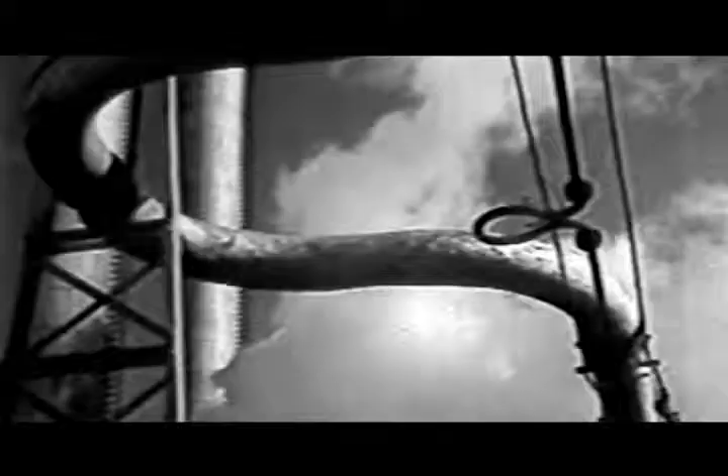The consumption of gasoline in 2005 reached the amount of 67 million liters per day, and Iran was still struggling to achieve the balance between gasoline consumption and production.

Accordingly, the planning department of Iranian National Oil Refining and Distribution Company recognized as mandatory the execution of 10 projects, expansion and upgrading operation in 7 refineries, by reviewing and comparing the investment plans of Middle East countries in the coming 5 years. The decision was approved anticipating a 4 million liter increase in gasoline production per day in Iran.

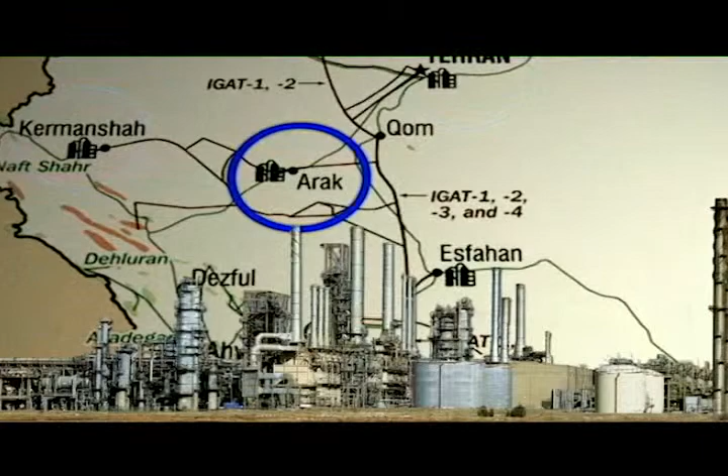The first and most important refinery determined for executing the expansion project was Imam Khomeini Refinery near Shazand, a town near Arak.

The NIORDC company delegated the expansion project of this refinery to National Iranian Oil Engineering and Construction Company, its project executive wing, and as a matter of fact it was their first crucial refinery project after 15 years. Its feasibility study and policy review were accomplished with high sensitivity considering the political and economic conditions of those years.

The feasibility study of the project took place in the planning department of NIORDC with the cooperation of NIOC company in 2002.

Selecting the RHU plus RFCC model as the appropriate model, this project with a 45-month schedule was approved in the Supreme Economic Council and Council of Ministers in 2003.

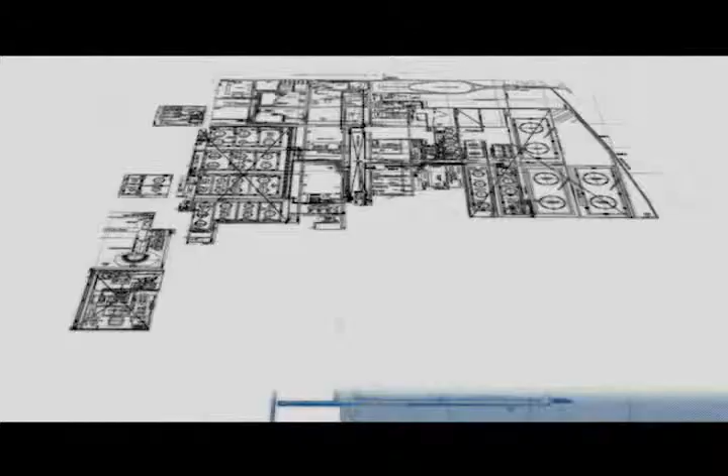The contract with JGC company was for 11 months, which we could terminate on time fortunately, with the efforts of all practitioners such as contractors, the employer team, and the companies that had the technology. In July 2005, JGC submitted all design documents to the employer completely.

At the initial time, when the basic design was in process, different supervisors from corporate planning management, NIOC company, and even our colleagues from Shazand Refinery were present in Japan. This means this stage was accomplished with full study and dominance.

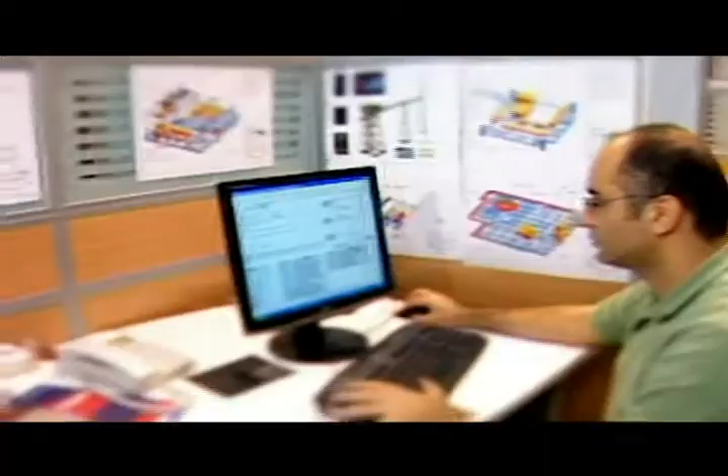At the beginning, there were 4 targets specified to be considered by JGC company in the basic design. First, to increase the producing capacity from 170,000 barrels per day to 250,000 barrels.

Second, to increase the capacity of gasoline production from 4.7 million liters per day to 15.9 million liters. Third, to improve the quality of current and future products to Euro 4 and 5 standards.

Fourth, to reduce environmental pollution by changing the feeding type from 100% Ahvaz light crude oil to 55% Ahvaz oil and 45% heavy crude oil from other fields.

Until then, we supplied 100% of our feed from Ahvaz Asmari, but in the detailed engineering it was designed to use 45% from the heavy crude oil of the northern Dezful field, 10% from a mixture of 10 different fields, and the rest from Ahvaz Asmari.

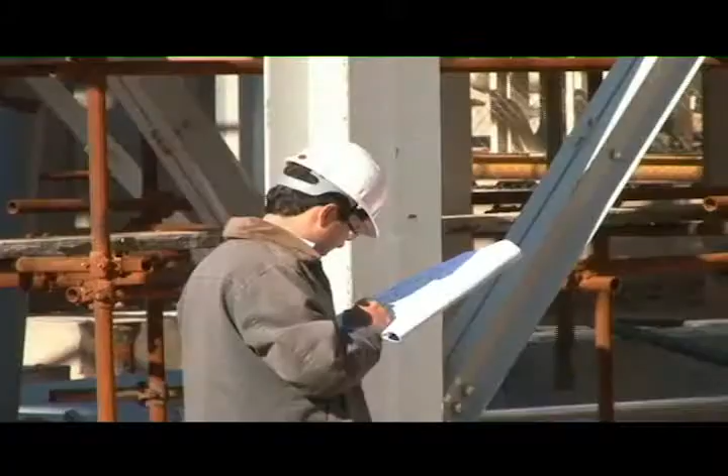The project started in three parallel scopes: planning and engineering, procurement, and construction. The detailed engineering of the different units broke down quite distinctively between the members of the consortium, and construction of each unit started under the supervision of the project management.

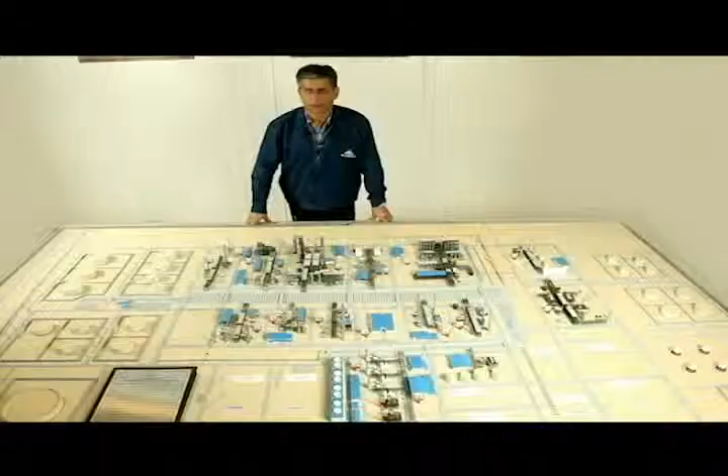At the beginning, when the vision plan was taking place, it was necessary to specify the scope of works of each consortium member. That was accomplished by cooperation and coordination and holding regular meetings, and the scope of work of each member was specified in this way.

Shazand Consultant Company took responsibility for the main distillation unit of the project, hydrogen unit, gas oil treatment unit, kerosene treatment, isomerization, the final distillation of gasoline, and also some parts of the reservoir tanks. The utility unit, including electricity power, water and steam unit, was divided between SEI and Shazand, though at the end Shazand did the major activities there.

Design, construction and installations in optimizer, RFCC and RCD units were carried out by SEI, and ODCC executed the LPG and propylene, amine and sulfur units and the rest of the tanks.

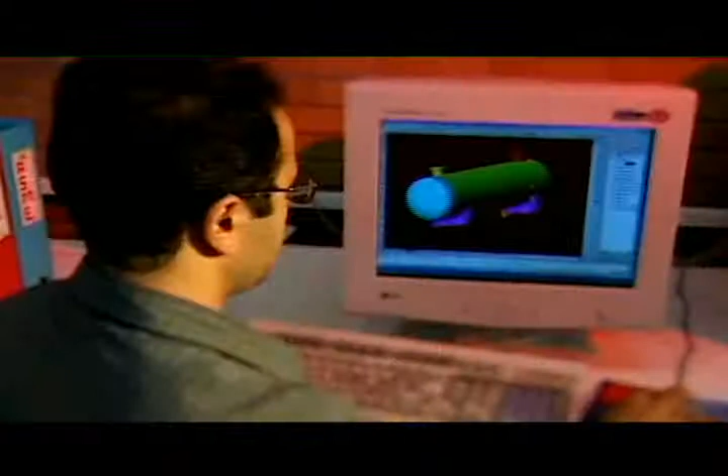In the planning and engineering part, more than 27,000 documents were generated, and in units that faced sanctions, reverse engineering got priority. Catalyst, pumps, and 46 purchase requests of spare parts were not delivered by vendors because of international sanctions. But the sanctions resulted in an approach toward domestic manufacturers for manufacturing the sanctioned goods, and consequently the project highlighted its national nature even in procurement of goods.

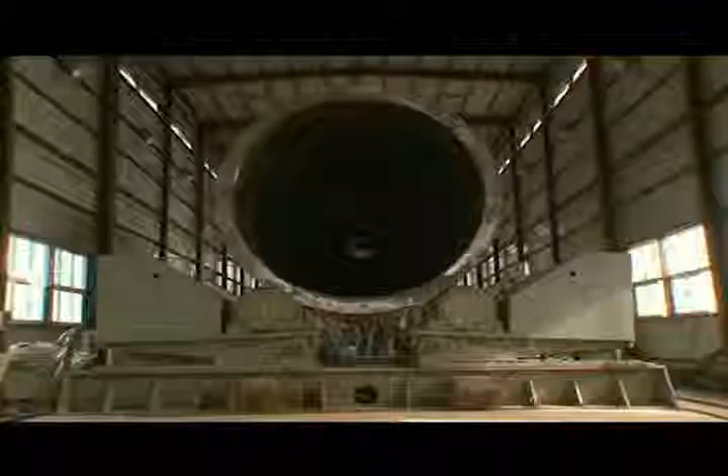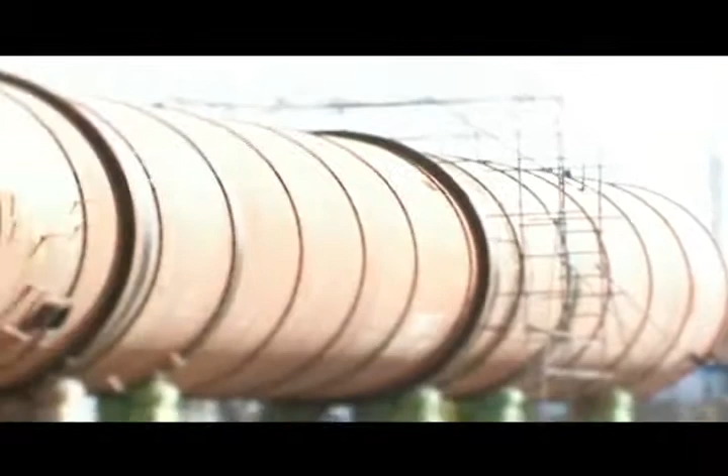A consortium of domestic manufacturers was formed to create synergy in potential and order manufacturing of the project's equipment. As a result, more than 166 kinds of equipment and goods needed for the project were manufactured by 128 Iranian companies. That was 45% of all used equipment, an unprecedented number in the history of refinery construction in Iran.

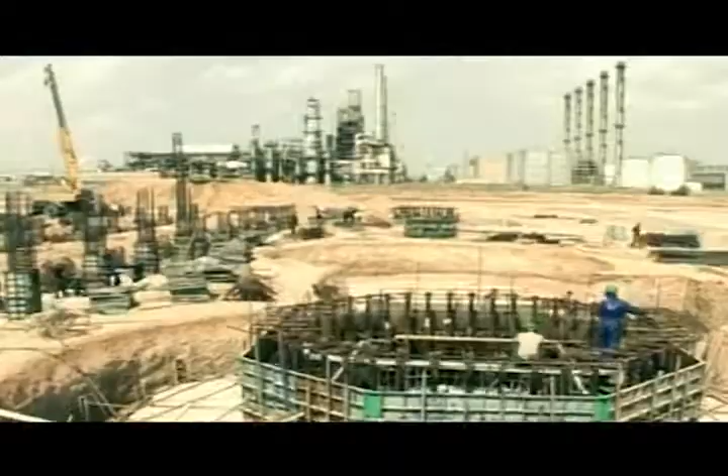An astonishing phenomenon happened in the construction part of the Imam Khomeini Refinery expansion and upgrading project, and left some records, as some of its operation quantities and amounts are unique and unprecedented in the country and region.

In 300 acres of the project area, more than 2.5 million cubic meters of excavation and soil filling was operated. More than 320,000 cubic meters of concrete, 43,000 tons of reinforcement.

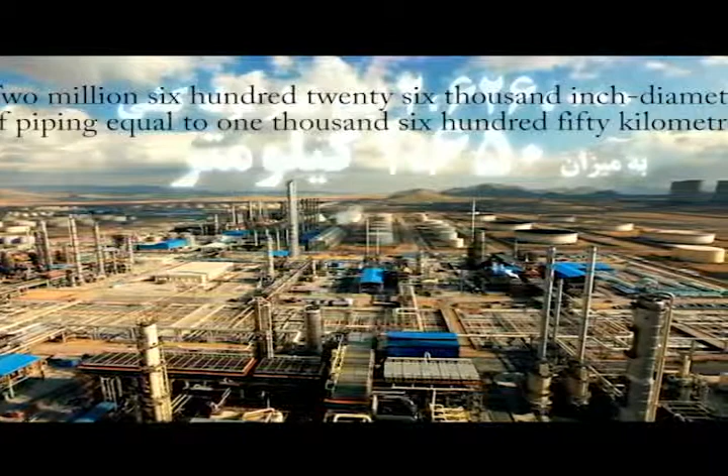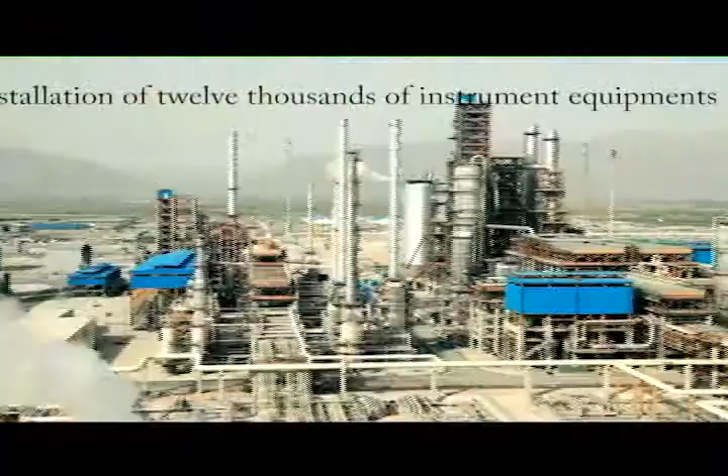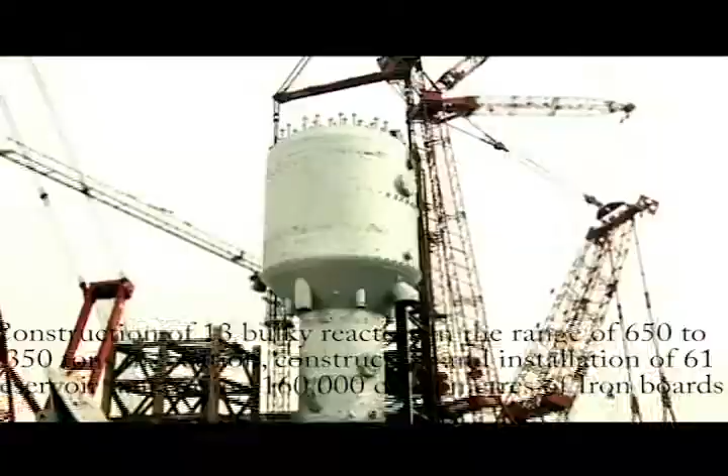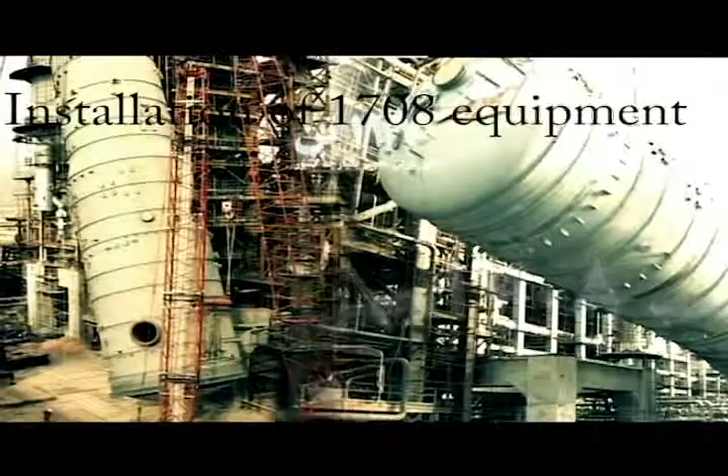2,626,000 inch-diameters of piping equal to 1,650 kilometers, 4,000 kilometers of cabling, 650 kilometers of welding, installation of 12,000 instruments, construction and installation of 61 reservoir tanks using 160,000 cubic meters of iron boards, and in total installation of 1708 equipment, the biggest one with 1,470 tons known as the heaviest integrated equipment of the country.

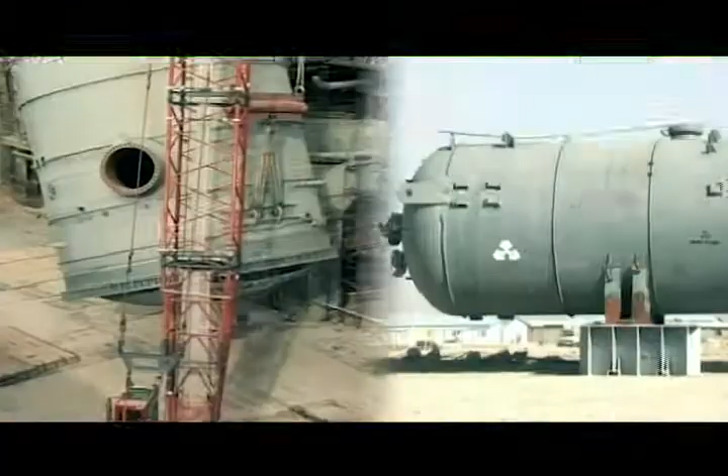Besides the impressive progress in executive operations, this project could receive the reward of the best Iranian mega project for the first time in the country.

Conception of these quantities and the vast executive operation in the Imam Khomeini Refinery's upgrading and expansion project, accomplished using 100 million man-hours of work, is a great honor in the history of the Iranian oil refining industry. It is a lofty mountain whose story of conquest is beyond these quantities and numbers. It should be experienced to be understood.

Now, 100 years have passed since the construction of the first refinery in the country. In these 100 years, we never could realize the dream of having balance between consumption and production of gasoline. But now, we can believe that this dream is closer to reality.

The Imam Khomeini Refinery, as the first refinery constructed after the revolution, is expanded now, and by producing 16 million liters per day, stands on top of the rank of producers in the country. After 100 years, now we can say we could do it, and we will do it again.